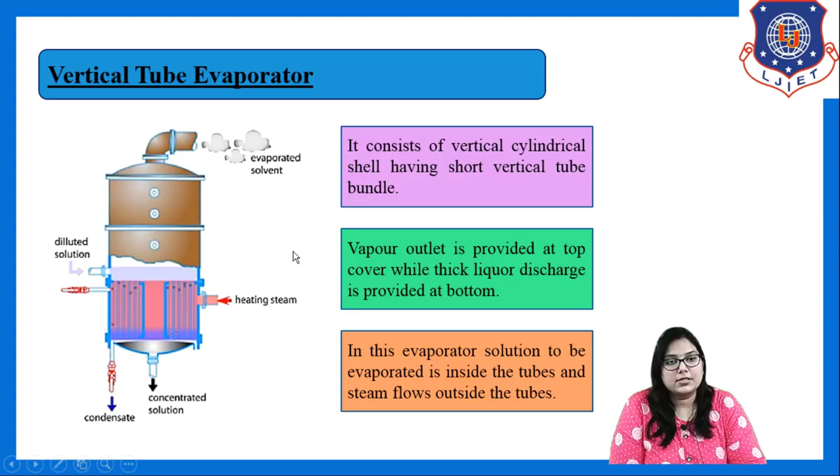So, this vertical tube evaporator consists of a vertical cylindrical shell having a short vertical tube bundle. The vapor outlet is provided at the top cover, while the thick liquor or concentrated solution discharge is provided at the bottom. Now, the second difference compared to the horizontal tube evaporator: in this evaporator, the solution to be evaporated is inside the tubes and steam flows outside the tube. In horizontal tube evaporator, the steam flows inside the tube and the feed to be concentrated is outside the tube.

In the case of vertical tube evaporator, opposite to that, the solution to be concentrated flows inside the tubes and steam flows outside the tubes. This is a very important point of difference between horizontal tube evaporator and vertical tube evaporator. Again I am repeating, in vertical tube evaporator, the feed solution flows inside the tubes and the steam flows outside the tube, opposite to horizontal tube evaporator.

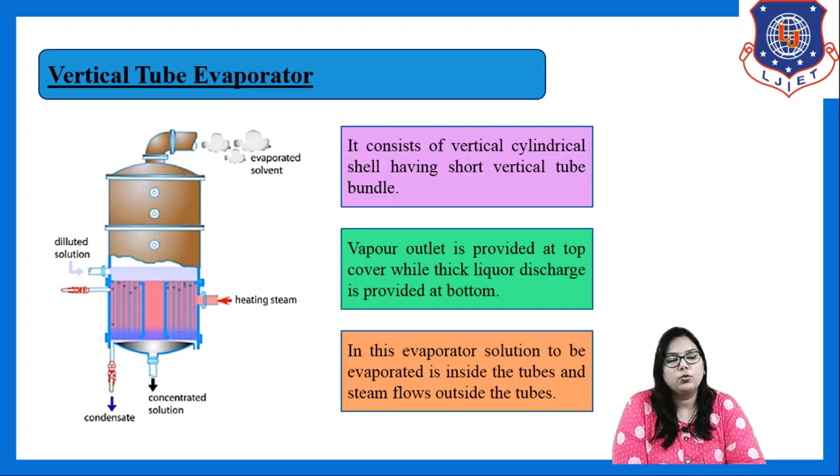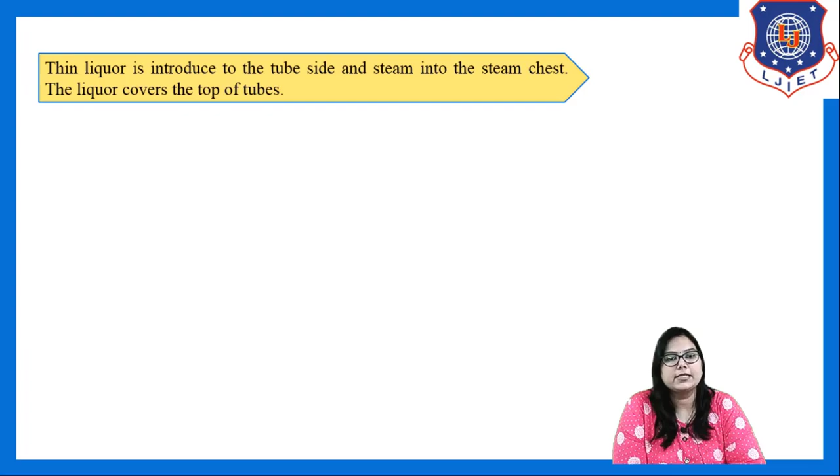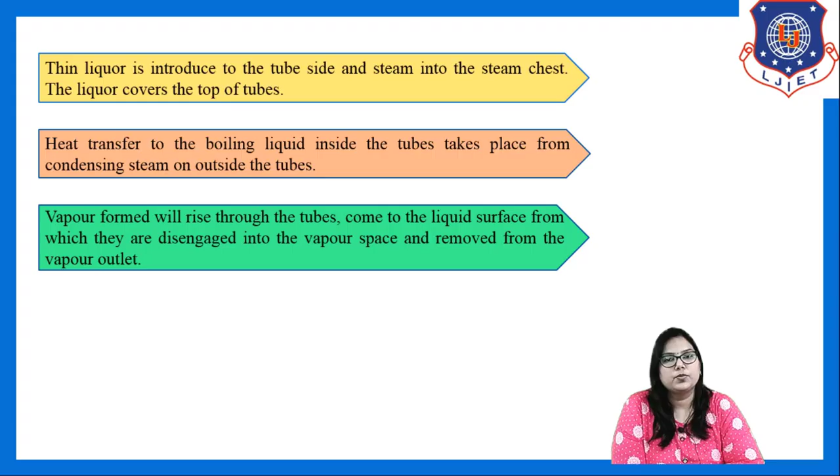Another thing, thin liquor is introduced to the tube side and steam into the steam chest, as I told you. And the liquor, that means the feed solution, covers the top of the tubes. Heat transfer to the boiling liquid inside the tubes takes place from the condensing steam on the outside of the tubes. As the feed solution is inside the tubes and the condensing steam is outside, heat transfer takes place between the liquid and the steam.

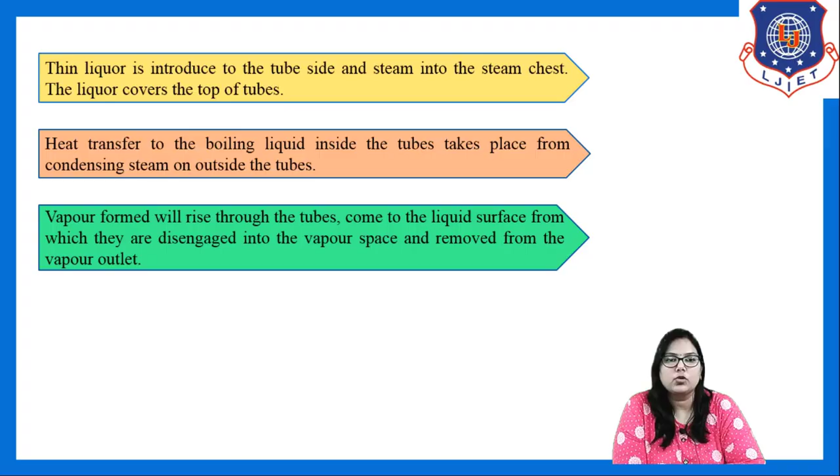Now the vapor which is formed will rise through the tubes, come to the liquid surface, from which it is disengaged into the vapor space and removed from the vapor outlet. As the feed solution is inside the tubes, boiling or evaporation takes place inside the tubes. So the vapor travels upward through the tubes, then above the evaporator body, and is removed from the top of the body.

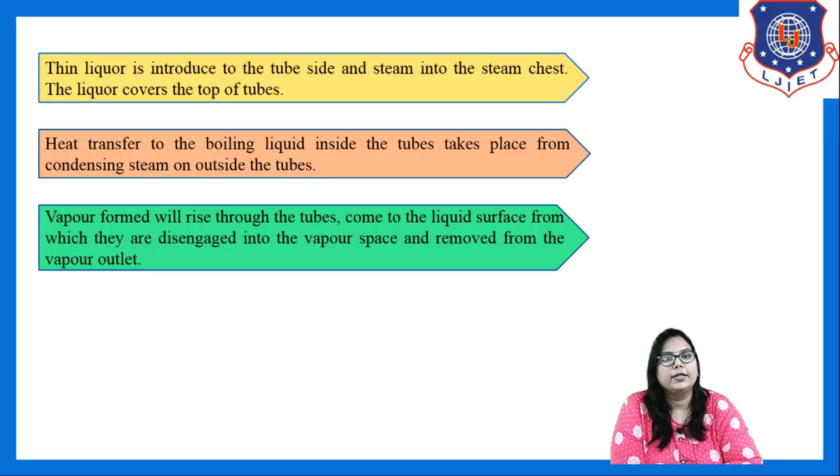Right? The major advantages of using vertical tube evaporator is it is relatively inexpensive and gives high heat transfer coefficient. These are the two major advantages of using vertical tube evaporator. Which are that? First, it is relatively inexpensive, and second, it gives higher heat transfer coefficient.

And the disadvantages include floor space required is large and not suitable for viscous liquid. When we are using this vertical tube evaporator, the floor space required is large and it is not suitable for the viscous liquid. When we have to handle the viscous liquid, we cannot go for vertical tube evaporator. So these are the advantages and disadvantages of vertical tube evaporator and how it works and how it is constructed. So this is the third type of natural circulation evaporator.

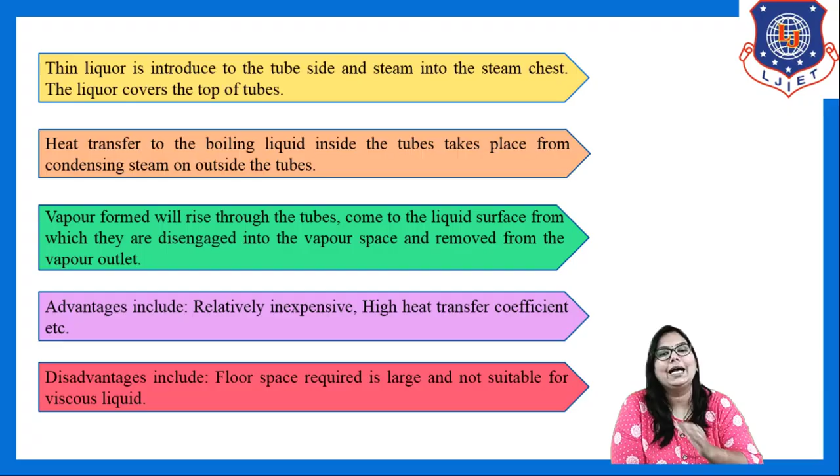Now let's see the last and fourth type of natural circulation evaporator, the falling film evaporator. This falling film evaporator is also known as long tube evaporator, long tube vertical evaporator. Previously we have seen the short tube vertical evaporator, which is also known as calandria type evaporator, and this is the long tube vertical evaporator, which is also known as falling film evaporator. In the short tube vertical evaporator, the height of the vertical heating element is short, while in this case the height of the vertical heating element is high, and that's why we call it a falling film evaporator.

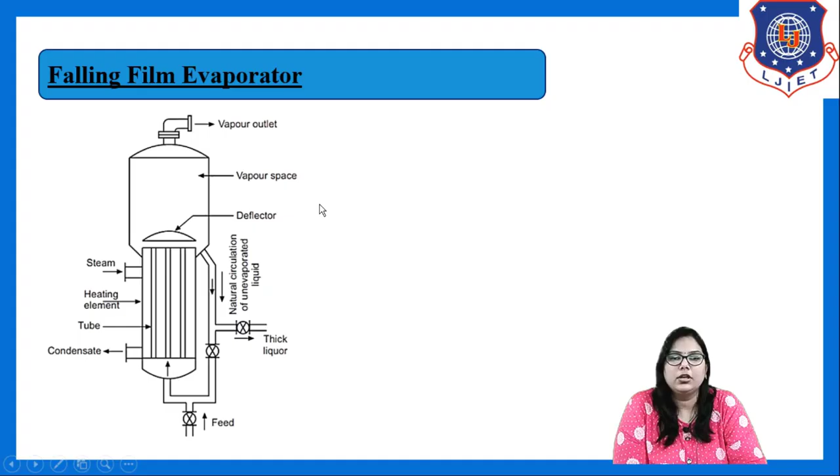See the construction of this falling film evaporator. This is the long vertical heating element, this is the vapor outlet, this is the steam inlet, this is the condensate outlet, and the feed inlet is provided from here. This long tube vertical heating element consists of a long tubular element incorporating tubes 25 mm to 50 mm in diameter and 4 to 5 meter in length. While designing such an evaporator, we must meet this specification: the diameter of the tube varies between 25 mm to 50 mm and the length between 4 to 5 meter.

Another thing, the tubular heating element projects into the vapor space. See here, this portion. This heating element extends into the upper part of the evaporator body. So the tubular heating element projects into the vapor space for removing the entrained liquid from the vapor. If there are some liquid droplets in the vapor, they are removed in the vapor space. Right?

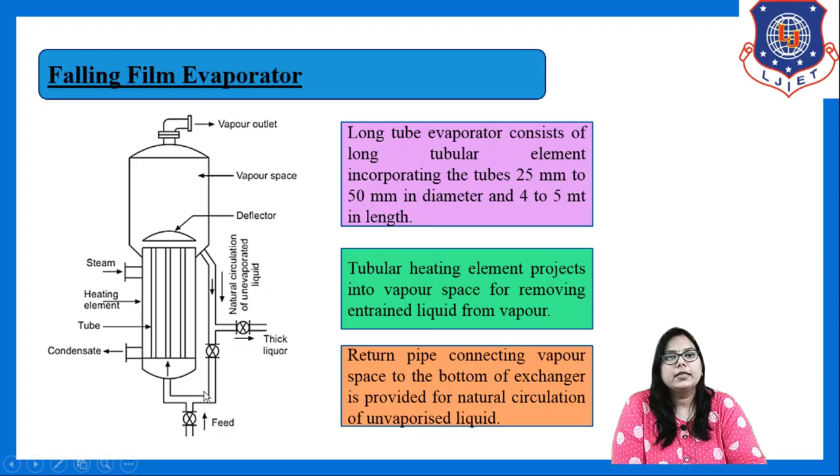And this is the return pipe. The return pipe connects the vapor space to the bottom of the exchanger for natural circulation of unvaporized liquid. This is the additional feature of this falling film evaporator. The return pipe connects the vapor space and the exchanger for the natural circulation of unvaporized liquid.

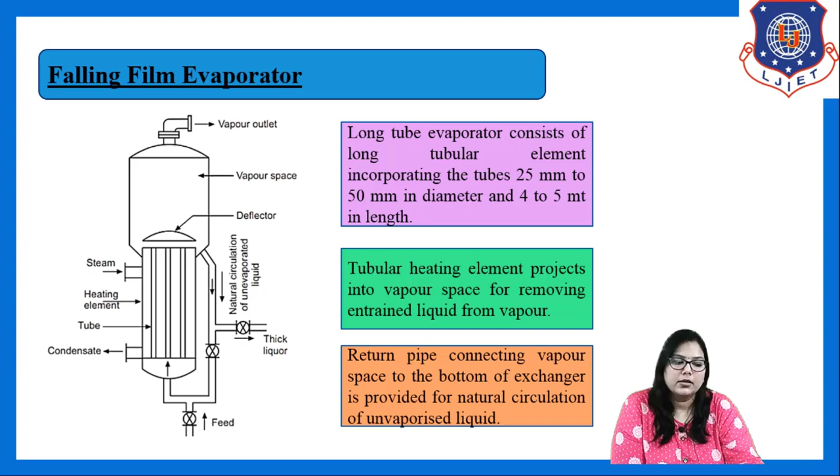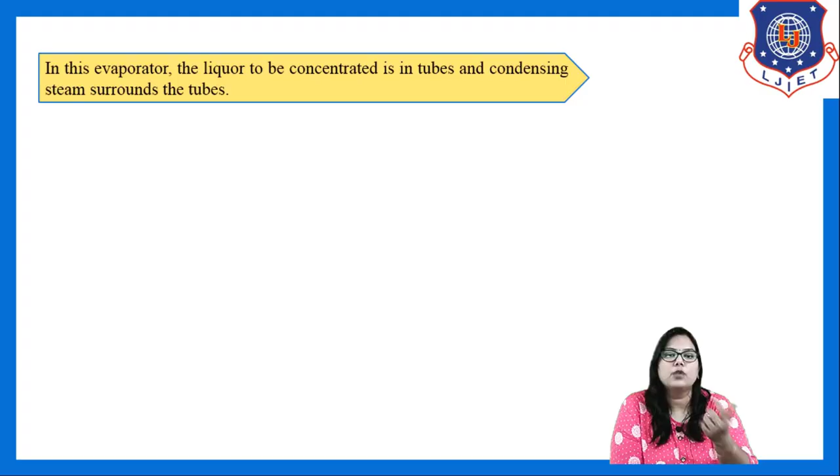So, in this evaporator, the liquid to be concentrated is in the tubes and condensing steam surrounds the tubes, same as in short tube vertical evaporator. That means the steam is outside the tubes. In this evaporator, feed enters the bottom of the tubes as you can see in the figure. It gets heated by condensing steam and starts to boil.

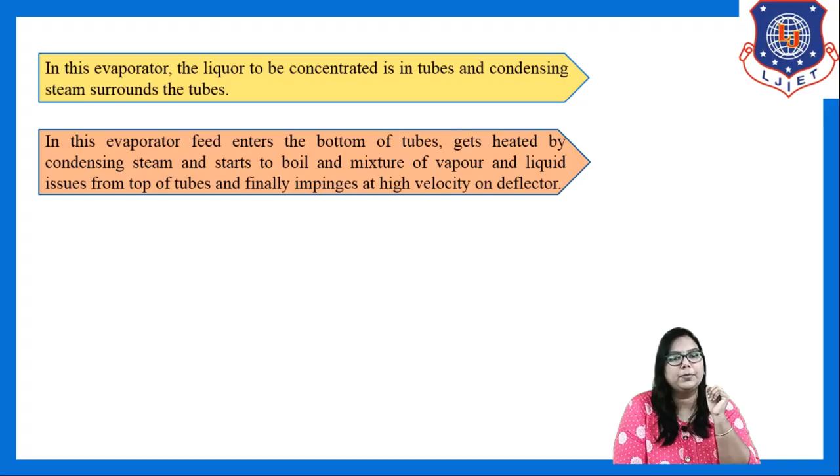And then the mixture of vapor and liquid issues from the top of the tubes, and finally it impinges at high velocity on the deflector. Impinges means it impacts on the deflector, which is provided in the vapor space. What is the function of the deflector? The deflector separates the unvaporized liquid portion from vapor. Then the separated liquid enters the bottom of the exchanger through the return pipe, and part of this liquid is taken as a product.

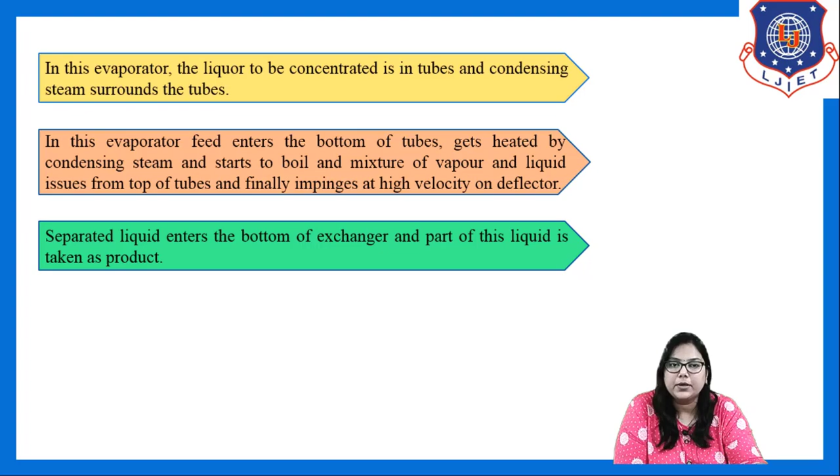So the function of the deflector is to separate the unvaporized liquid present in the vapor, and then it goes into the return pipe, the separated liquid enters the bottom of the exchanger, and part of the liquid is taken as a product.

This type of long tube vertical evaporator or falling film evaporator is widely used for foamy and frothy liquors, because only this type of evaporator uses such a deflector. In other types we are not using a deflector. The main function of the deflector is to remove the unvaporized liquid from the vapor, and that's why this type of evaporator is mainly used for foamy and frothy liquors.

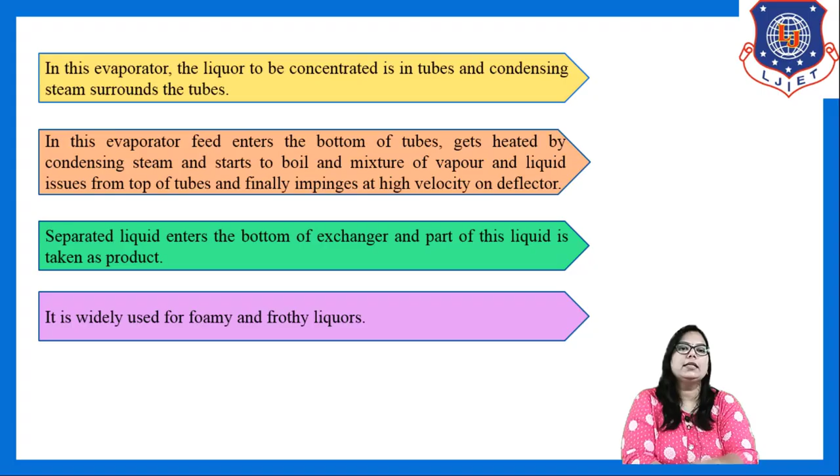So, in today's session we have completed another two types of natural circulation evaporator, which are the long tube vertical evaporator and short tube vertical evaporator.